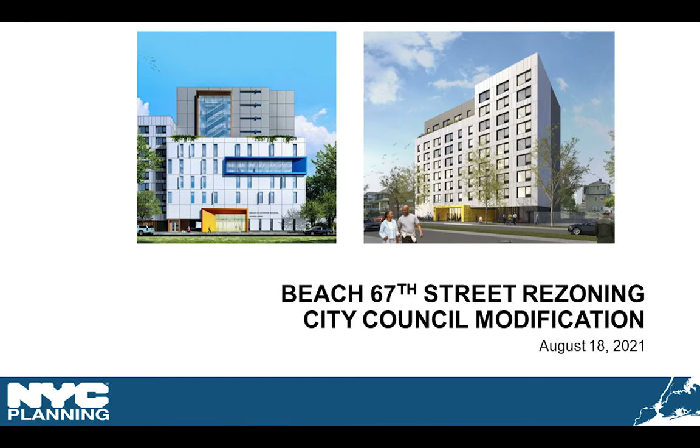Thank you. Good morning, Commissioners. This application is returning to the Commission after it was approved on July 14th as a result of the City Council modification. Next slide, please.

The modifications would reduce the rezoning boundary by eliminating one zoning lot, Block 16041, Lot 6, which is currently improved with an 8-story nursing home. Removing the nursing home site would limit the rezoning boundary to the development site lots. The nursing home would remain zoned R4A, and the development site would be rezoned to R6.

Though this is inadvisable, the modifications are within the scope of the project. No other portions of the application will change, and the applicant still proposes to construct a 9-story AIRS building and an 11-story charter school within the modified rezoning area.

The applicant has submitted a technical memorandum detailing the changes made to the project area boundary, and the E designations will be removed from the nursing home site, though the conclusions of the EAS would not change. That concludes my presentation, and I'm happy to answer any questions.

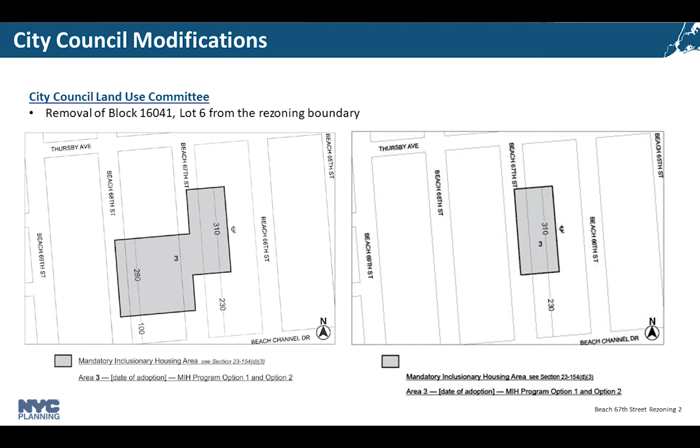So this was an instance in which the council modification is not changing what will be constructed. We had thought it made better planning rationale to bring the nursing home into more conformance. The community raised concerns about it, which were shared by the council. But the change clearly is within scope.

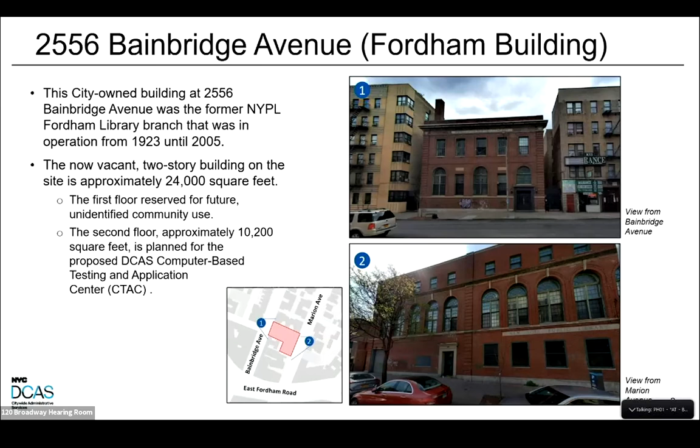It is a 2-story building, which is now vacant. It's the former site of the Fordham Public Library. We are talking about the second floor use today. It's about 10,200 square feet for a computer-based testing center. The first floor will be designated for community use at a later time.

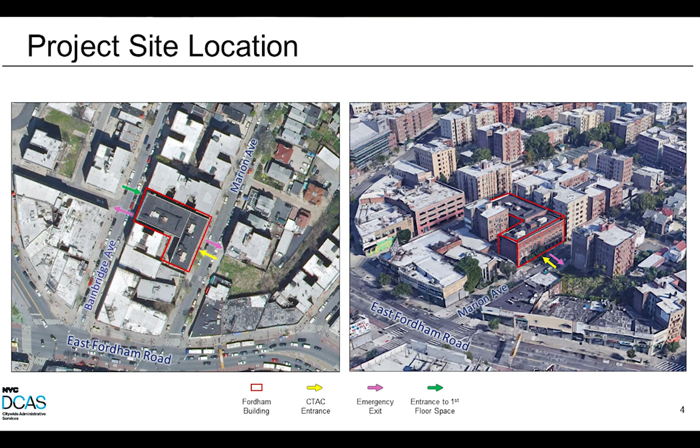This is an aerial view of the building, and as you can see, there are 2 entrances. The entrance on Marion Avenue will be the entrance for the testing center. The entrance on the Bainbridge side will be the entrance for the community use on the first floor. Next slide.

A little bit about us. We are the Department of Citywide Administrative Services. We provide shared services to support New York City government operations, and we're responsible for the recruitment, hiring, and training of city employees and other personnel services. That's part of our mission, amongst many others, and that is where the CTAC, or testing center, will fall. Next slide.

Human capital. I am proudly serving as the Deputy Commissioner for Human Capital, and we are responsible for, amongst many other things, maintaining the city's civil service system. Again, this is where our testing centers fall in, because we offer tests for jobs at this location.

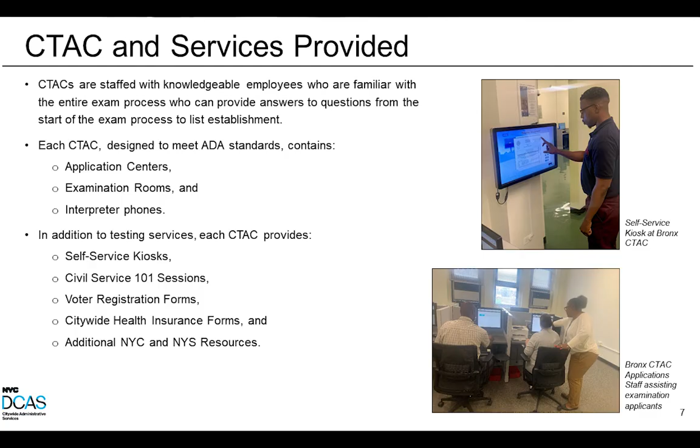Next slide. We give about 120 exams for jobs per year, and moving to this location would double our capacity to provide service to the people of the Bronx. We provide application center options. People can come in for customer service requests. We have interpreter phones. We provide voter registration, all kinds of community-based interests.

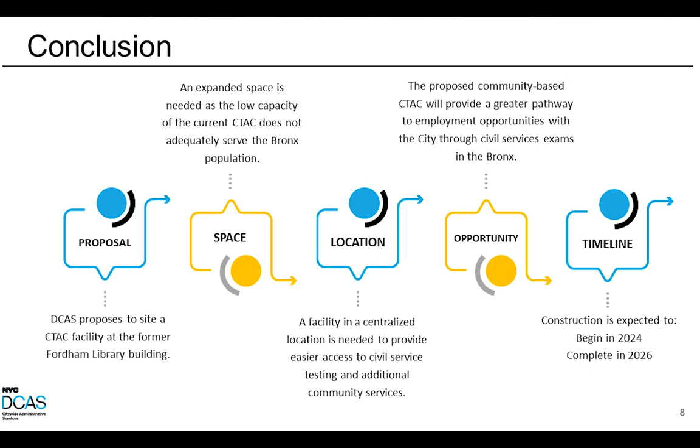Next slide. In conclusion, sorry, this is the fastest I've ever talked in my life. We propose for our testing center to move to the Fordham building, which is centrally located within the community.

Thank you. Perfect timing. Questions either for Ms. Rivetti or other members of the applicant team? Okay, thank you very much to the team and for your quick speaking.

Brian, have any other people signed up to speak on this matter? No, there are no further speakers on this item. And I don't see members of the public in the room. So with that, the public hearing is closed.

Thank you. Borough of the Bronx, calendar numbers 47 and 48, CD9. Calendar number 47, M030150A HOX. Calendar number 48, M040047A ZFX. A public hearing in the matter of applications for a modification and amendment to previously approved project plans concerning Stevenson Commons. Notice, a public hearing is being held by the City Planning Commission in conjunction with the above non-ULURP actions to receive comments related to a draft environmental impact statement. This hearing is being held pursuant to the State Environmental Quality Review Act and the City Environmental Quality Review.

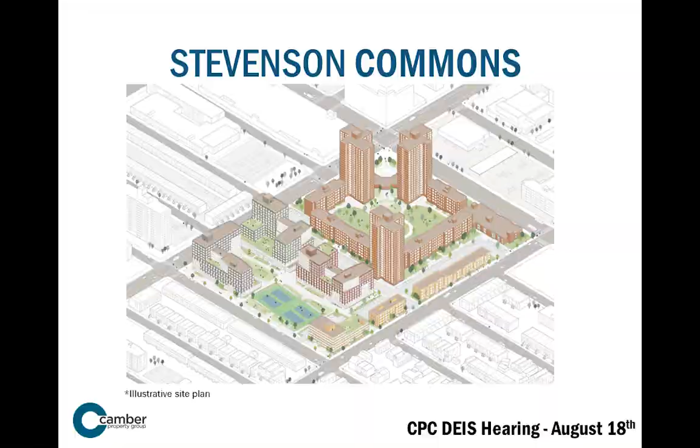We are going to have a 10-minute team presentation by a team comprised of Abir Sabet, Jacqueline Scarinci, Joanna Candell, Rick Gropper, Anderson Dosis, Joseph Dugopolsky, Claire Weiss, and Kathleen Dolphus.

Commissioner Marin is recused on this item. If we could wait a moment, Commissioner Dweck is recused, and so we need to get a quorum. Okay, we have a quorum, and so if I could ask the applicant team to please begin.

I don't see Jackie from Akerman available. Is she available at this moment? I would ask that the remainder of the large applicant team please commence the presentation. Sure. Okay. Then I will ask if we can forward to the next slide.

Good morning. My name is Joanna Candell. I am project manager for Stevenson Commons. Thank you to commissioners. We're pleased to be here today.

When complete, Jackie, you're here. Yes, I apologize. It was not put into the panelists, but thank you for adding me in. Thanks. Perfect. Well, I'll go quickly. So we already covered introductions, right?

Camber is requesting discretionary actions to facilitate a new residential and community facility development. The Stevenson Commons site, outlined in red, consists of the entire 679,000 square foot superblock bounded by Lafayette to the north, White Plains Road to the east, Seward Avenue to the south, and Thieriot Avenue to the west.

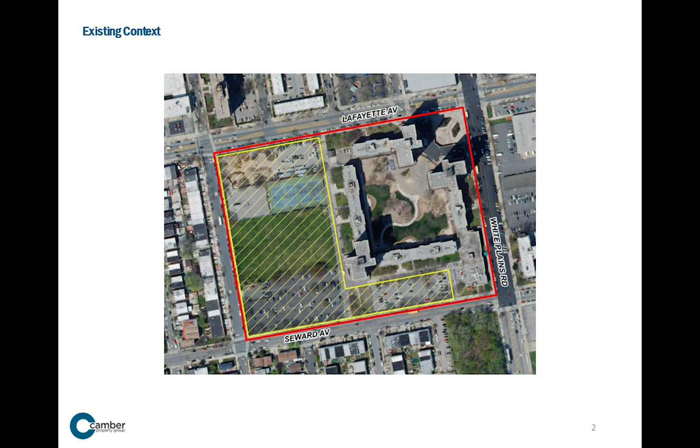The eastern portion of the Stevenson Commons site is occupied by a 9-building Mitchell-Lama housing development with 948 income-restricted housing units, local retail, and a health center. The western portion of the block is occupied by underutilized land, surface accessory parking, and private tennis and handball courts that have been closed due to unsafe conditions. The proposed new development will be located on this western portion of the property.

The proposed development is compliant with the underlying R6 zoning district. The location and bulk of the existing Stevenson Commons buildings will not change, and no new modifications of the zoning provisions are required for either the proposed new development or the existing Stevenson Commons development.

The actions requested by Camber Property Group are: the first is a modification to the 1973 Stevenson Commons large-scale residential development plan to update the previously approved plans and zoning calculations to reflect the proposed new mixed-use development. The second is a modification to the 1973 Stevenson Commons city-aided limited profit housing project pursuant to New York State private housing finance law to update the proposed development.

The DEIS conducted in connection with the project identified significant adverse impacts in construction noise, construction traffic, and transportation traffic, and further analysis and mitigation measures will be studied between the DEIS and FEIS for this project. I will now turn it over to Joanna Candell of Camber to discuss the project proposal in greater detail.

Thank you, Jackie, and thank you to the commissioners. When complete, the project will provide 700 units of affordable housing to the Soundview community, including senior, rental, and home ownership opportunities. In addition, the proposed project will include 33,000 square feet of community facility, 466 parking spaces available for residents of the development, along with passive and active recreation opportunities in the newly landscaped area.

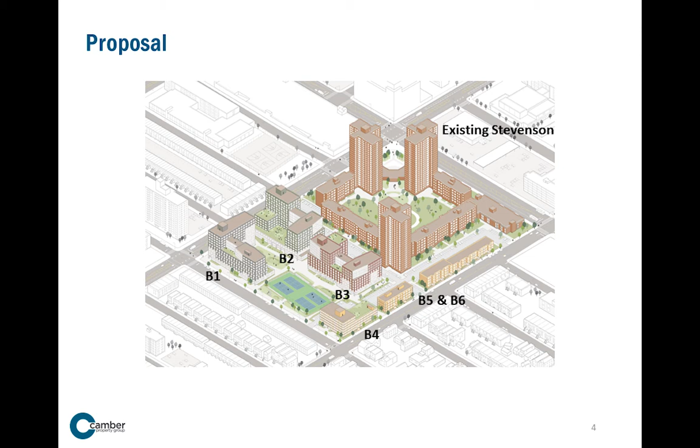Originally built in 1975, Stevenson Commons is a 9-building Mitchell-Lama complex, inclusive of 948 units of Mitchell-Lama housing overseen by HPD. In 2017, with financing and continued oversight from HDC and HPD, Camber purchased the property, extending the regulatory agreement an additional 40 years, obtaining project-based vouchers, and financing a $36 million capital improvement campaign. These improvements included upgrades to apartments and building systems, along with upgrades to common areas and security.

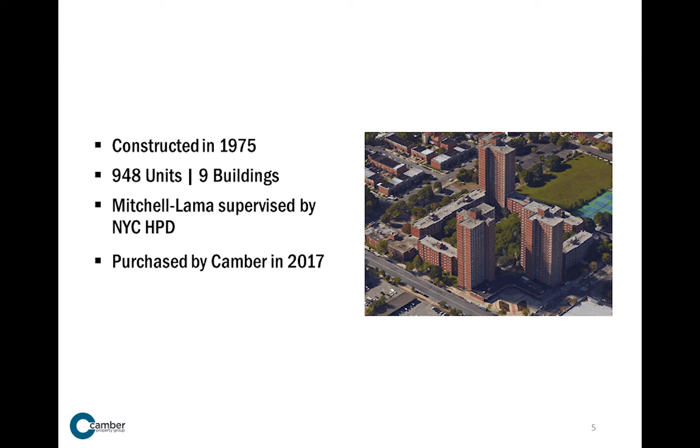Additional quality of life improvements included new services for building seniors through our partnership with RAIN and the reestablishment of the Stevenson Commons Tenants Association.

Next slide. As designed, the project will enhance the pedestrian experience by activating otherwise unusable area that is currently closed off to pedestrians. When complete, the proposed project will include a convenient pathway for neighborhood residents to use, along with new tennis facilities, a new playground designed in collaboration with Community Board 9, and passive recreation areas.

The community facility space will be distributed across multiple buildings and will include universal pre-K, space for after-school programming and community events, along with an administrative area for the New York Junior Tennis and Learning Center to build up their community tennis program that already exists at Stevenson Commons.

Parking will be provided for residents of the existing property, along with residents of the new development, and project construction will be phased to ensure tenant quality of life and parking availability is not affected.

Next slide. Our first phase is our home ownership phase, and I'll move quickly through these, and I'm happy to answer questions on them later. This will include 58 units of affordable cooperative housing built in partnership with Habitat for Humanity and available to individuals earning between 80 to 100% of AMI.

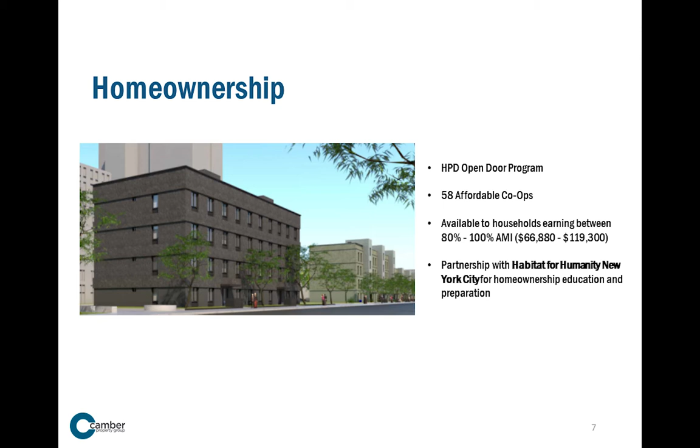Next slide. Our second phase is the senior community, which will include 117 units of senior housing built under HPD's SARA program and available to individuals and households making up to 50% of AMI. We are partnering with RAIN again to provide social services on site here.

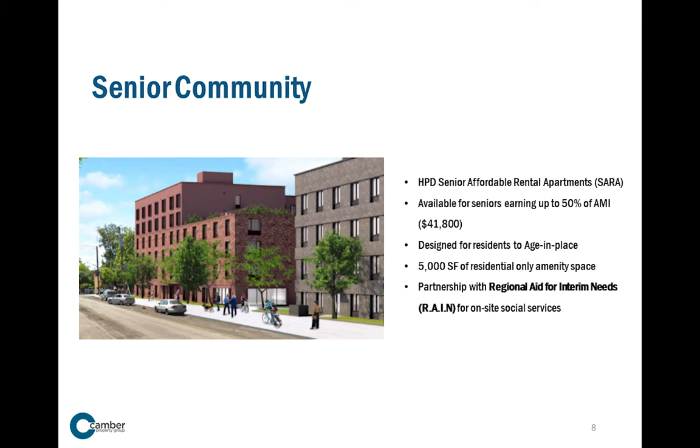And lastly, next slide please, is our multifamily rental properties. These 3 buildings will combined have over 600 units and will be built in conjunction with HPD's low and moderate income term sheets. I'm going to pass the presentation over to my colleague Jacob from WXY, who can review the site design and planning.

Hi, Jacob from WXY here. Next slide, please. So the master plan breaks open a courtyard typology with new pedestrian connections on this half of the super block, with a major pedestrian path aligned with Leland Avenue.

There's east-west connections as well that align with the secondary entrance to Stevenson Commons and to the south of the existing courtyard complex. The existing service drive, shown in the bottom right in gray, is realigned with Underhill Avenue at the north and is lined with parking and serves as a spine to connect at-grade lots and 2 structured lots, maintaining existing tenant parking and parking required for the new developments.

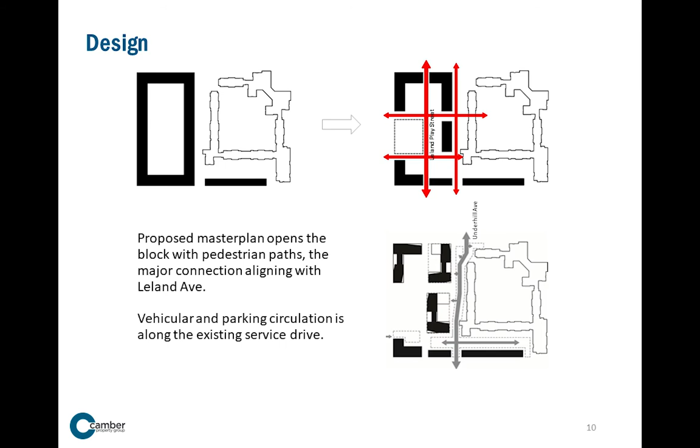Next slide. The proposed massing negotiates between the tower-in-the-park developments to the north and the east and the townhome scale to the south. Proposed buildings B1, B2, and B3 at the north.

They start with a 6-story block that relates to the existing complex and provides a street wall along Lafayette Avenue and set back along Thieriot Avenue to the west. The upper building portions vary in height from a total building height of 14 floors at the northeast down to 9 floors and are broken down through single-loaded segments between a higher and lower bar in each of these 3 buildings. And then select corners are chamfered in the zoning envelope to further break down the massing in this composition.

The 3 buildings along Seward Avenue step down from a 6 and 4-story senior building at the corner, B4, and 4 and 3-story walk-up units, B5 and B6. And the careful stepping and variation of heights and building types will provide a frame for the open space.

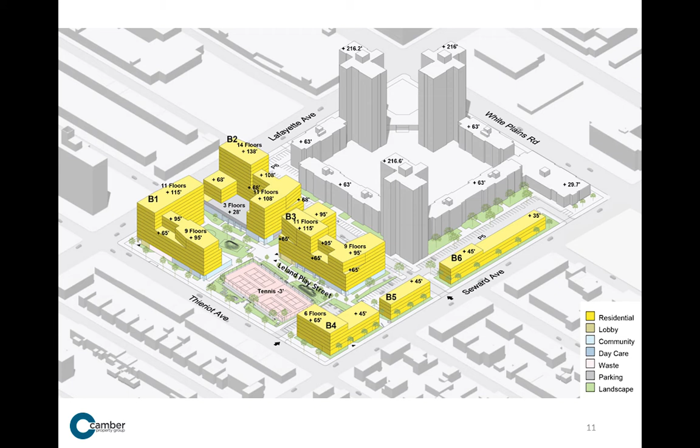Next slide. So the open space is activated through outdoor program spaces and gathering and seating supported by the buildings around. You can see the primary elements, Leland Ave or the Leland Play Street.

And starting from Lafayette Avenue at the north, there's a proposed playground, urban fitness, adjacent to a new childcare facility in B1. The 4 existing tennis courts on site are rotated and resituated at this side for optimal sun exposure.

And as mentioned, will be operated by the New York Junior Tennis League, which will also have ground floor space in B1. Community gardens allotments around the tennis courts and multi-generational and community rooms in B1, B2, and B3 along the Leland Play Street to support senior and youth after school programming along this path.

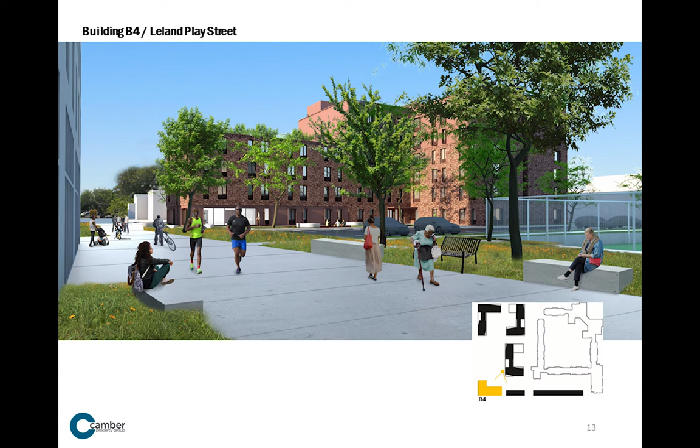Here's a view of the proposed Leland Play Street with tennis courts to the right, a wide pedestrian path, and direct visibility from the street. That's building B4, the senior building at the corner, which has a pass-through lobby to engage Seward Avenue and also connect to open spaces for seniors to the north.

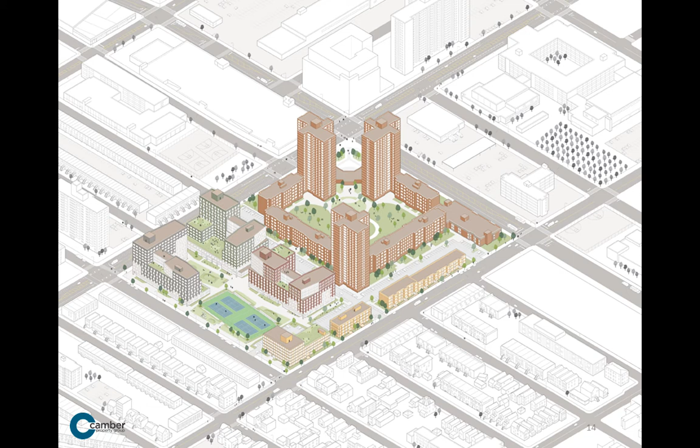Next slide. So the overall view provides a set of 6 new buildings that work between the adjacent 21-story towers, and the proposed massing steps from 14 stories at the northeast to 3 stories at the south. Materiality and colors will complement the existing brick of Stevenson Commons and the wide variety of colors and textures in the context. The community benefits of open space.

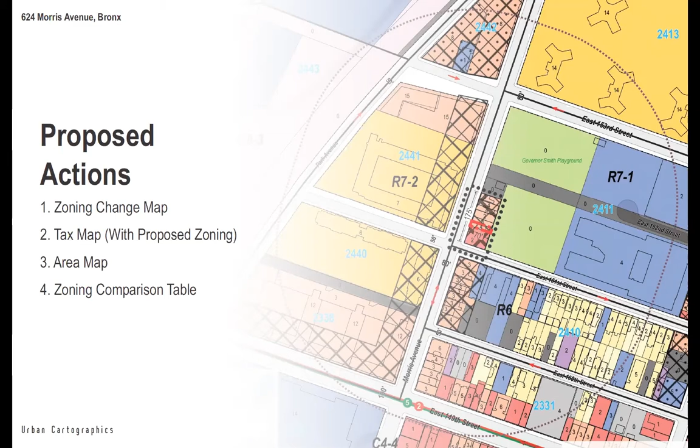Thank you very much. Questions from the commission? Thank you. And Ryan, I don't see any other folks signed up to testify. No, there are no further speakers signed up on this item. Okay, then this public hearing is closed.

Borough of Queens, calendar numbers 50, 51, CD8, calendar number 50, C210192, ZMQ, calendar number 51, N210193, ZRQ. A public hearing in the matter of an application for zoning map and zoning text amendments concerning 185-17 Hillside Avenue rezoning. Our first speaker will be Richard Lobel.

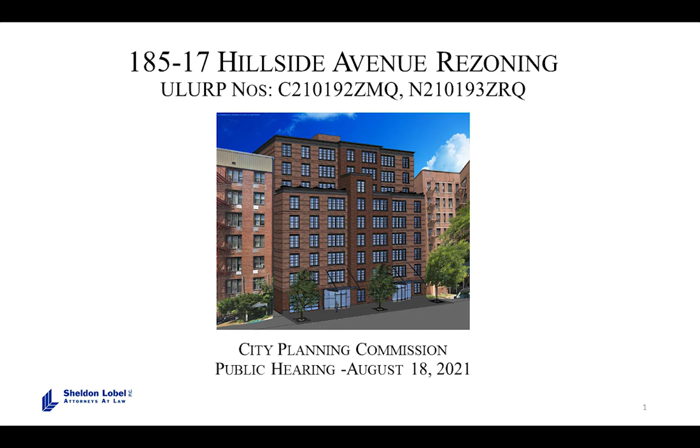We join you today to discuss the 185-17 Hillside Avenue rezoning. Really what we're seeking here is several actions: first, a map amendment to rezone part of 5 lots from R3X to R7A C24. There would also be a zoning text amendment to allow certain provisions of Article 11, Chapter 5 to extend to properties within this special downtown Jamaica district. So the rezoning includes both the map amendment and a text amendment to extend the downtown Jamaica district. And finally, revisions to Appendix F to allow mandatory inclusionary housing to apply.

On the zoning map here, it's useful to note that the special district is only mapped where there is largely limited development, not only on this block but also on other blocks burdened with this condition. So 1,000 feet to the west along Hillside Avenue, the special district pursuant to the Jamaica plan zones these districts to the full lot depth of 180 feet or 160 feet, and to the east matches lot depths of 100 feet. Here, however, despite having a lot that exceeds that amount going to 160 feet, the Jamaica district was only mapped to 100 feet. This has resulted for many of these properties in underdevelopment or no development.

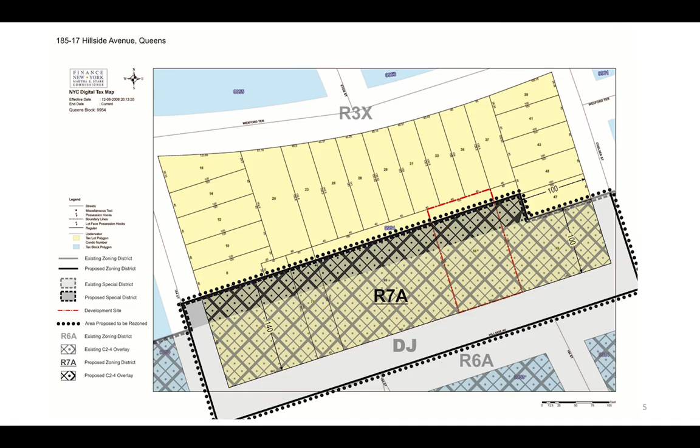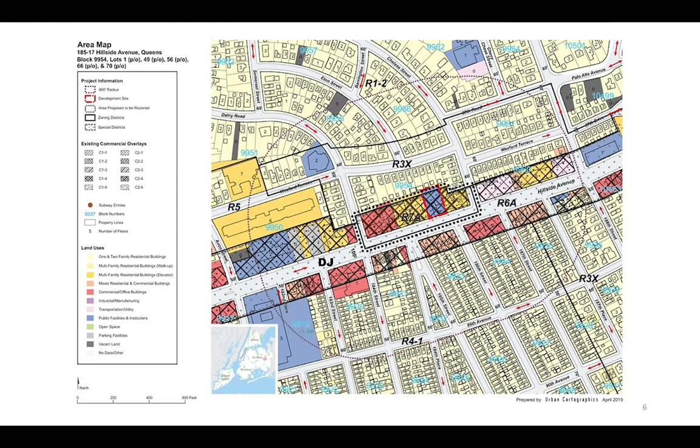So I would close merely with demonstrating why this is such a good idea. The lot here lies along Hillside Avenue, a 100-foot wide street. The lot is additionally near public transportation, with Jamaica being a transit hub, particularly with regards to several subway lines and over 8 bus lines that traverse Hillside Avenue. And with that, although we have maps and photos demonstrating the proposed plans and units, we'll produce development in line with the surrounding residential buildings of 6 to 7 stories, and I'm happy to answer questions.

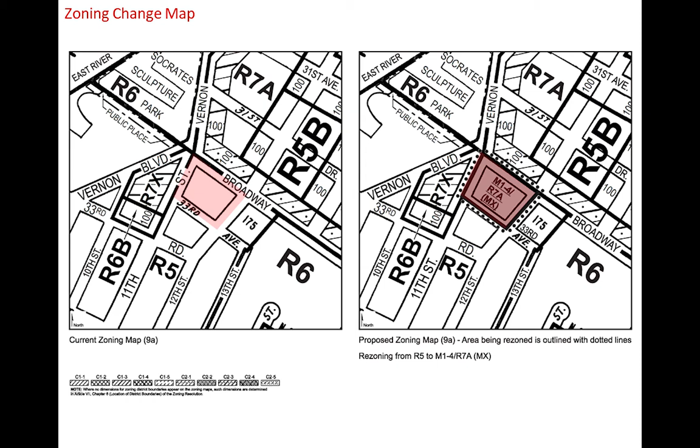Next slide, please. This slide shows the existing R5 zoning on the left with the site shaded in red. The right shows the proposed M1-4 R7A MX23 district. The special mixed-use zoning designation was established in 1997 to encourage investment in and enhance the vitality of existing neighborhoods, such as Ravenswood, with mixed residential and industrial uses in close proximity. It was intended to create opportunities like this project for mixed-use communities by allowing a balance of and variety of uses, including light industrial uses consistent with the historic character of the area. The MX district allows for new medium density mixed use development with the surrounding built context.

Next slide, please. The proposed action would facilitate a mixed-use development with approximately 199 dwelling units, 50 of which would be permanently income restricted, and new job-generating uses, including approximately 26,686 square feet of commercial and light industrial uses, proposed as a grocery store, local retail with an outdoor cafe, an artist studio, wine distributor, and floral production studio. The proposed MX zoning district ensures that this range of uses is permitted in the project area.

The breakdown of MIH units by income band and unit size is shown on this slide: 17 units at 40% AMI, 17 at 60%, and 16 at 80%, for a total of 50 permanently income restricted units for MIH option 1. HANAC will be the project's MIH administering agent. And now I'll turn it over to Nelly Hennessy of Caliendo to discuss the design. Next slide, please.

Good morning, commissioners. The proposed building wraps the entire block, maintaining a continuous street wall on each frontage with active first floor uses to enhance the streetscape.

To accommodate the non-residential programming, off-street accessory loading berths are provided on 33rd Avenue and 12th Street. A freight elevator is located adjacent to the 12th Street loading dock to provide direct access to the cellar.

The northwestern corner of the building is chamfered to accommodate an outdoor seating area accessory to the first floor commercial space. Next slide, please. The next two slides show the proposed building from all sides.

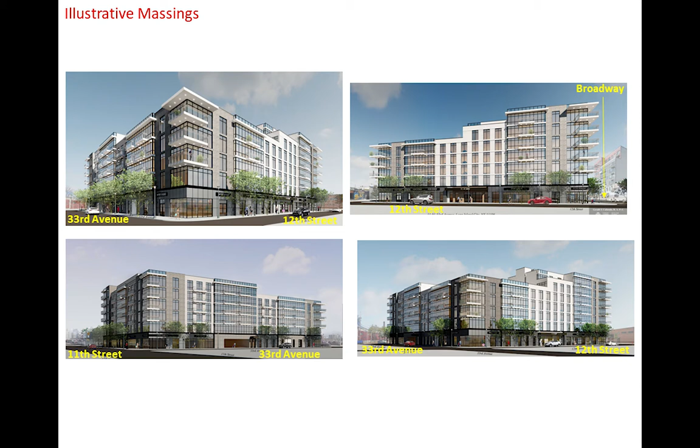Here you can see how the building steps down from 7 stories on Broadway. Along 33rd Avenue, the southwestern corner of the building at 11th Street is 6 stories, and the southeastern corner of the building at 12th Street is 5 stories.

Now Damien Smith will discuss programming. Next slide, please.

Good morning. The proposed development serves a need in the community as there's currently very little local retail in the area. The ground floor of the proposed development has a grocery store, wine distributor, floral production studio, and local retail. The proposed MX zoning district ensures that this range of uses is permitted in the project area.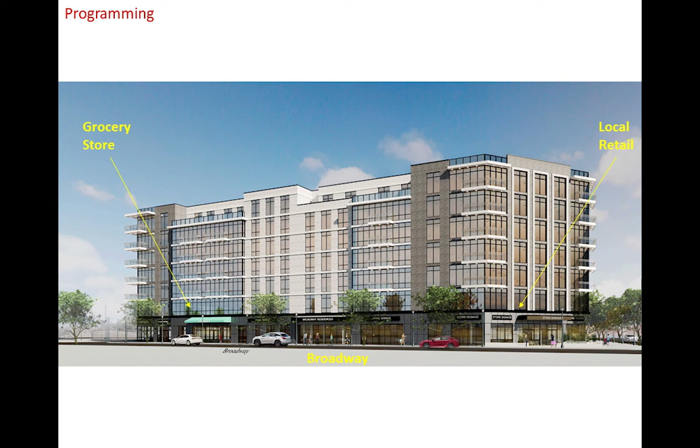Next slide, please. The wine distributor and floral production studio are both intended for existing local Queens businesses seeking new space in the area. The wine distributor, Tobacco Wine Merchants Inc., is planning to move its operations from Nassau County. The florist, Cambridge Floral Design, intends to relocate from Long Island City.

That's the end of the presentation. We're available for questions.

Thank you. Questions from the commission? Commissioner Capelli: Hello, yes. Can you explain exactly what a wine distributor is and what a floral production studio is?

The wine distributor sells bulk wine to restaurants in the New York City area, Westchester, and Nassau County. They bring in pallets of wine, then break them up and distribute them as needed to the restaurants.

The Floral Design company works in a lot of the hospitals and office buildings in Manhattan to do all the floral and decorations and landscaping at the front of the buildings and in the lobbies for all the commercial buildings.

Is there any retail component with either of these? There will be a retail component with the Floral Design. There is a florist as well, and then they also produce baskets and other floral productions.

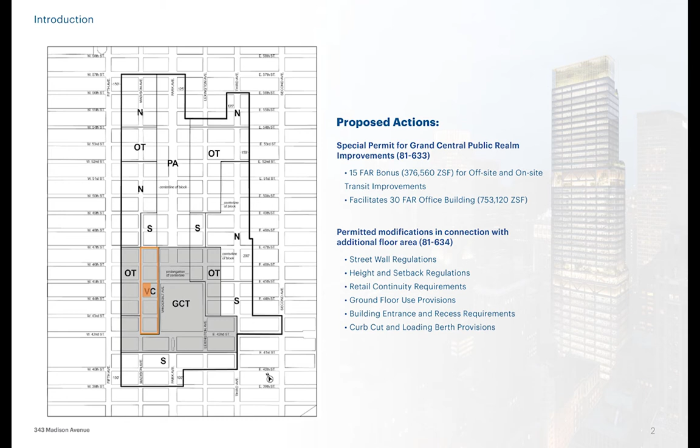Bob will give some background on the project's importance for the MTA. Thank you, Zach. I'm Bob Paley, Director of Transit-Oriented Development at the MTA. This project has been long in the planning.

In 2015, MTA moved out of our Madison Avenue building and consolidated staff at 2 Broadway. Following an RFP and competitive bidding process, the MTA board approved the selection of Boston Properties to develop the property under a 99-year ground lease. Under the approved transaction, Boston Properties will pay MTA yearly rental payments as well as full property taxes.

As contemplated by the RFP, these payments will provide critical ongoing funds to support MTA's capital budget. The project will provide both on-site and off-site transit improvements. Off-site, there will be 3 scopes of circulation improvements within the 42nd Street subway station. On-site, the project will construct the first direct entrance to the Long Island Railroad's new station on the east side, which we refer to as East Side Access. Zach will walk through the details of the off-site improvements first.

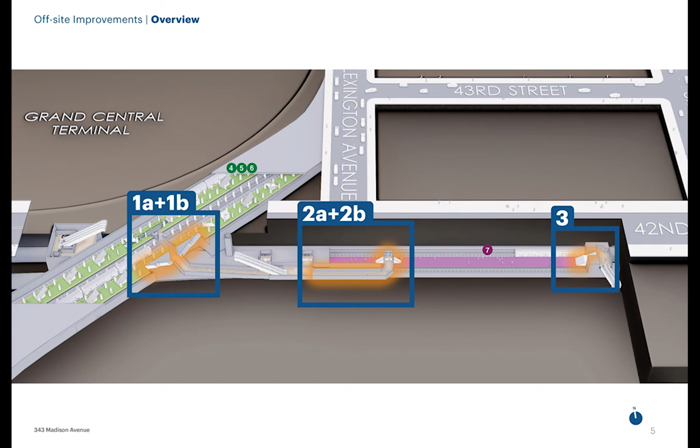On screen now is the 42nd Street subway station. The Lexington line platform, shown in green at the left of the screen, runs at a diagonal here. The Flushing line platform, shown in purple, runs east-west, a level below the Lexington line. The proposed off-site improvements provide 3 critical packages of improvements to these platforms, which I'll walk you through one by one.

The first improvement is expansion of the 2 staircases leading from the northbound 4-5-6 platform to allow an additional passenger lane at each stair, increasing capacity by 1/3. This will contribute to better on-time performance on the Lexington line.

Moving down to the Flushing line platform, the second scope of work is construction of a new passageway and a pair of staircases at the center of the platform, where no stair exists today. The additional stairs will reduce the time passengers are lined up on the platform waiting to move toward their destinations. To connect this stair, a new passageway will be constructed underneath Lexington Avenue, which you can see above on the left side of the screen, as an extension of the existing mezzanine level for the Flushing line.

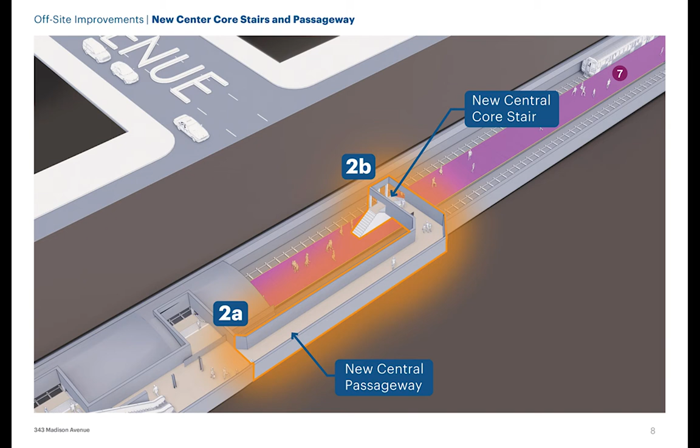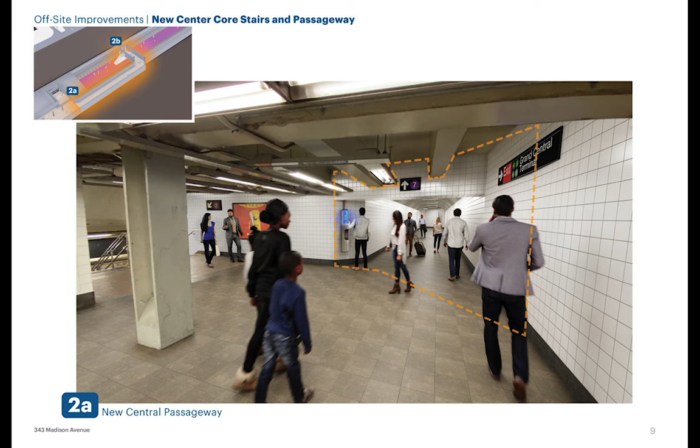Here's a rendering of the new passageway. It's outlined in orange or yellow on the screen. Right now there's a wall there, and the passageway you see looking forward is underneath Lexington Avenue, as I described.

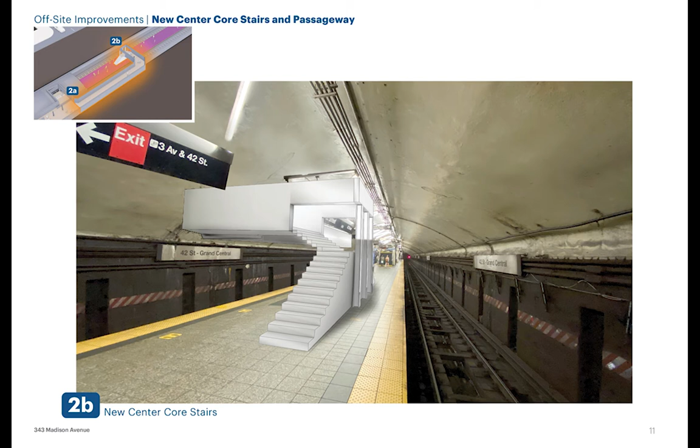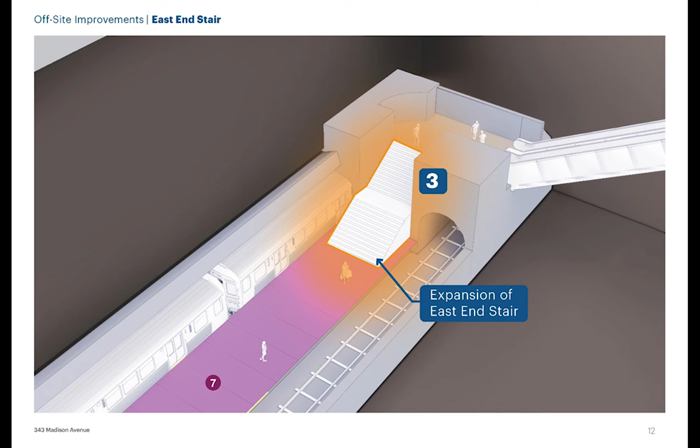The third scope of offsite improvements is widening the east end stair, which connects up to 3rd Avenue, from 4 lanes to 6 lanes. This stair is currently a bottleneck in the passenger flow, causing backups on the platform. The expansion will provide improved passenger flow and a better rider experience.

Here's an image of the existing east end stairs, with the white on the sides illustrating the 50% expansion that is proposed. This is a rendering of the proposed new stairs with 3 stairways and 6 lanes instead of 4 lanes.

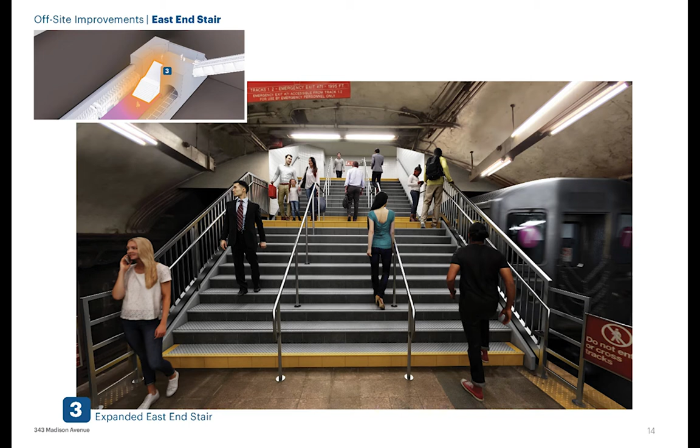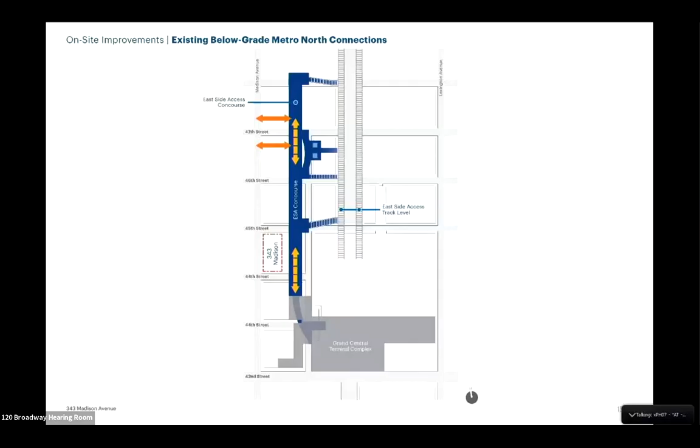I'll turn it back to Bob to introduce the on-site improvements. Next year, MTA will introduce the new East Side Access Terminal for Long Island Railroad, and the platforms for this terminal are located 160 feet below Park Avenue. Riders will get from their trains to the new Concourse using a set of 3 escalator banks from track level.

The largest escalator bank is at 45th Street, located at the southern end of the platform. Using currently planned street exits north and south of the development site, riders using this escalator bank would need to travel north or south to the street.

The redevelopment of 343 Madison allows our first direct escalators between street level and the Concourse. The direct access will be located in line with our largest escalator bank to the platform, directly in the desired path of travel of many riders. As compared to traveling north or south to exit, this entry provides substantially reduced travel times for our riders.

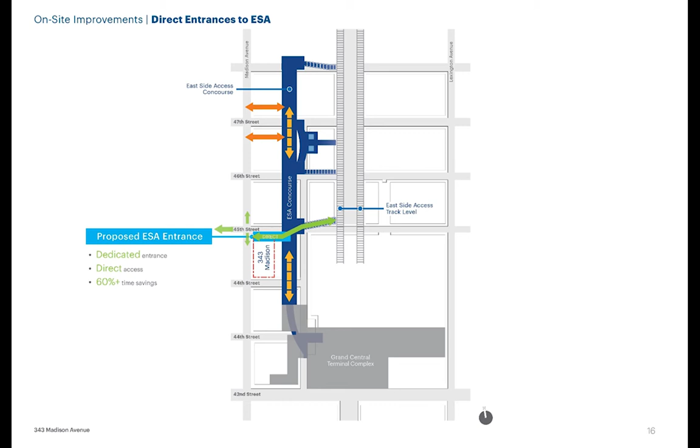I'm Rich Monopoly, Senior Vice President of Development for the New York region at Boston Properties. Thank you for having us today. This slide shows the existing site conditions with the ESA Concourse adjacent to bedrock below the site.

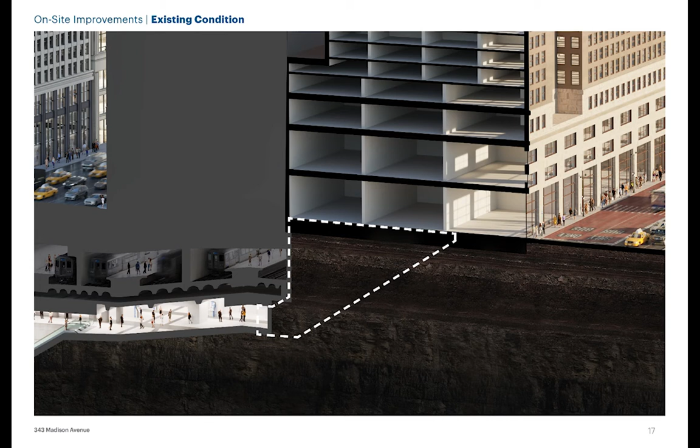The new entrance will connect directly Madison Avenue to the ESA Concourse level. Construction of this improvement involves excavation through bedrock to 50 feet below grade.

After the excavation of bedrock, we will install and maintain the following station elements: 3 escalators to reach the station 50 feet below grade, a new stairway you see in the center alongside the escalators, and on the right-hand side, an ADA elevator between street level and the ESA Concourse level. This rendering shows these elements leading to and from the ESA Concourse.

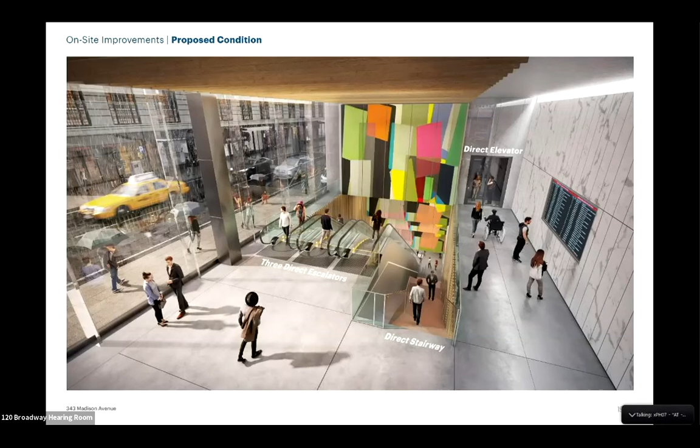Next slide, please. Here's a rendering of the new entrance looking south from 45th Street. We have recessed the building above, allowing a double height transparent entrance to stand out prominently from the rest of the building. This will become a well-known connection point in East Midtown.

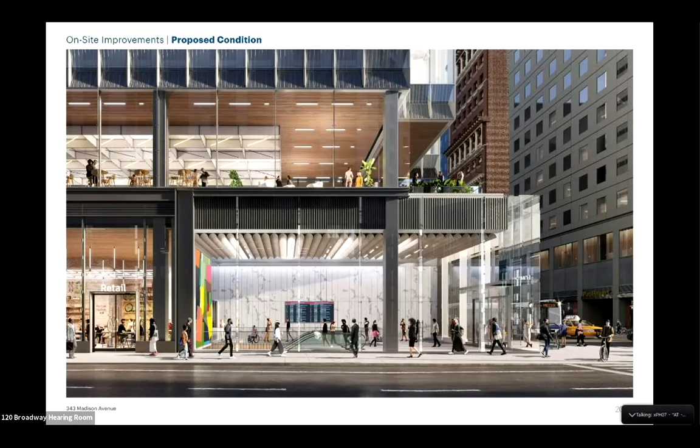With that, I'll turn it over to Andrew Cleary of KPF to tell you more about the building itself. Next slide, please. Thank you, Rich. The site footprint is 25,000 square feet in area, which is relatively small for an office development.

Within this footprint, the site planning is guided by the MTA's vent building on the south and the new transit entrance on the north. We are pushing the building back from Madison Avenue as required to create a 20-foot wide sidewalk, and we're widening the 45th Street sidewalk to 15 feet.

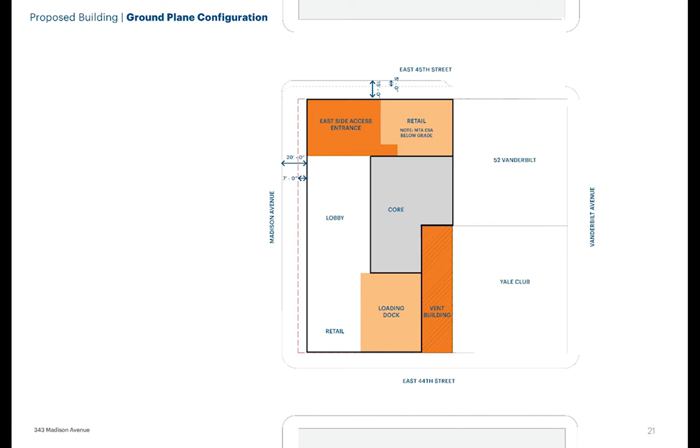Next slide, please. Taking those considerations into account, our core with the elevators will be at the eastern edge of the site. The building lobby will be along Madison Avenue, and required loading docks will be along 44th Street, with retail at the 44th Street corner and along 45th Street.

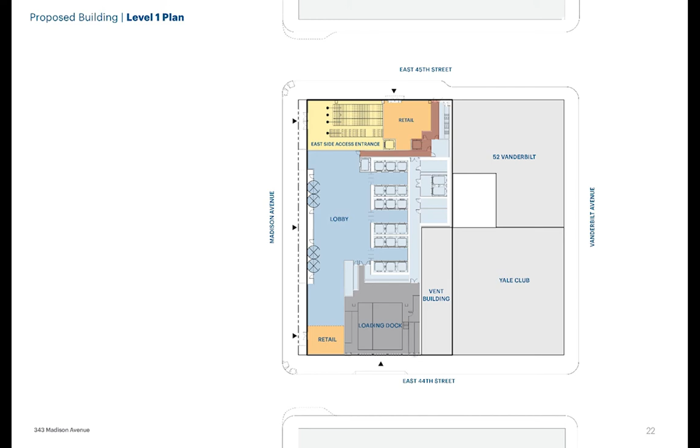The right-hand diagram illustrates the setbacks at the south of the building, breaking up the mass as the building rises. Next, please. This context elevation illustrates how the podium sits with the varying street walls of its neighbors. Our base at 321 feet is below that of our southern neighbor at 335 Madison, and similar to the height of the Yale Club to our east.

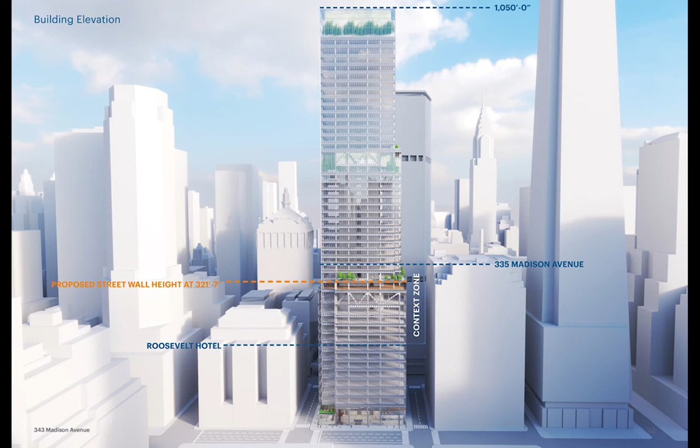The total building height of 1,050 feet is lower than One Vanderbilt and similar to that of the Chrysler Building, which you can see in the background a few blocks away. Next, please. And here is a view from East 45th Street showing another view of the transit entrance sitting proud with the building entrance, with the building recessed above.

Next slide, please. The Owl's Head facility site is within the Southwest Brooklyn Industrial Business Zone, IBZ, and this map shows that the majority of properties in the area are zoned industrial and manufacturing.

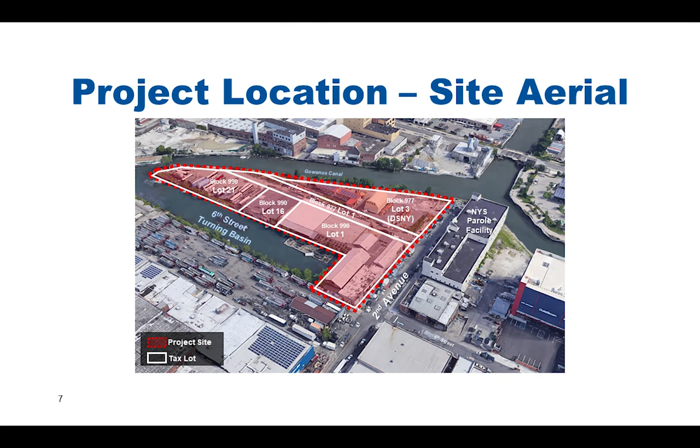Next slide, please. Here's an aerial of the site overlaid with the block and lot information of the parcels we plan to site select and acquire. Block 977, Lot 3 is already owned by the city and is home to the Department of Sanitation salt shed and plow storage, as well as composting and nursery facilities operated by Big Reuse in partnership with the Gowanus Canal Conservancy. We are working closely with sanitation and these organizations to relocate their operations during construction and reestablish permanent facilities for them on site.

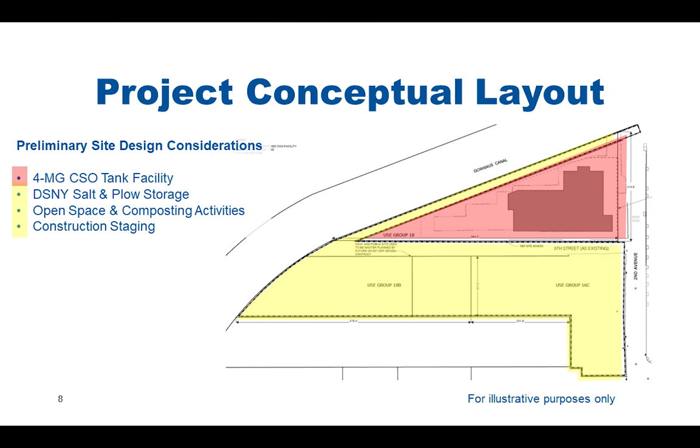Here's an illustrative slide of the conceptual layout for the use of the site. The salmon colored triangle at the top is the area that will be used for the DEP CSO tank and associated head house. The yellow areas will be used for construction staging of the CSO tank, relocation of DSNY's operations and Big Reuse and GCC's facilities, and also provide some open space along the waterfront.

Next slide, please. The first city map amendment would demap 5th Street between 2nd Avenue and the canal. The second city map amendment is at the head end facility site, and that would demap Douglass Street, which is a paper street, between Nevins Street and the canal. At this point, I'd like to turn over the presentation to my colleague, Rashid Lucas.

Thanks, Kevin. Next slide, please.

In February 2018, we issued an environmental impact statement, or EIS, which identified potential impacts to historic resources. DEP issued a technical memorandum this past April to review the environmental impact area and found no changes since 2018. DEP since completed a geoarchaeological assessment and concluded that there is a low potential to impact deeply buried archaeological sites. Nevertheless, DEP has committed to conduct archaeological monitoring during construction activities.

I'd like to pass it over to Lisa now. Thank you. Next slide, please. So this is our anticipated schedule.

We hope to complete ULURP later this year, and we are just kicking off design of the facility, and we plan to complete design in fall 2023. Construction is anticipated to take approximately 5 years with completion in 2028.

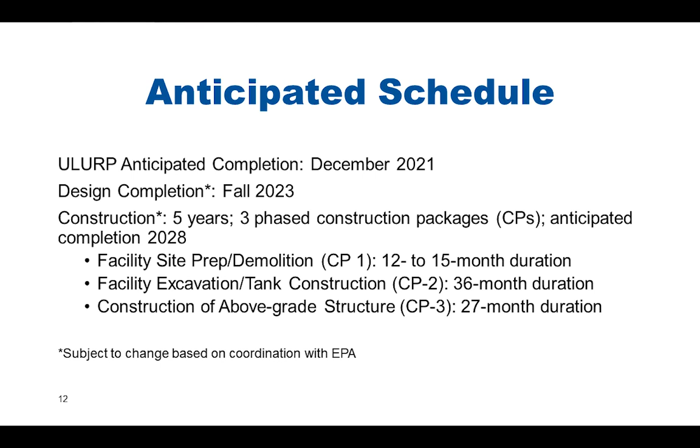We've broken up the construction into 3 construction packages. We call those CPs, and they have overlapping timelines, with durations noted on this slide. CP1 is site prep and demolition of the existing facilities, as well as relocation of DSNY's facilities. CP2 is all of the below ground work, including installation of the supportive excavation, the excavation itself, and the below ground structures. CP3 is the above ground work, including the head house and the fit out.

Next slide, please. The city has been in contact with property owners and the tenants on the parcels to be acquired. We're working with the South Brooklyn Industrial Development Corporation in our outreach to the tenants. Just this Monday, we had our first forum to discuss the project, how it will impact the tenants, and what resources are available to them.

We plan to work with SBIDC to keep the line of communication open, provide updates, and answer questions as they arise. Like we did with the head end site acquisition, the city will provide relocation services for business tenants, including help identifying new locations based on the tenant's needs, coordinating showings, and facilitating negotiations. This also includes potential reimbursement for reasonable moving expenses and compensation for trade fixtures.

Based on our schedule, we estimate that we could acquire the properties as early as spring 2022, and we would not require tenants to vacate at that time. Rather, the city would become the landlord and assist with relocation by the end of the year.

Next slide, please. In our community outreach related to the head end tank site, we had a series of meetings, workshops, and hearings in partnership with community stakeholders and also Councilman Levin's office. As we begin the design process for our Owl's Head tank, we are planning a number of opportunities for public engagement to educate the community about the project, to hear from folks about what they'd like to see here, and to solicit feedback on the design.

We're working closely with Councilmember Lander's office, as well as the Gowanus Canal Conservancy and SBIDC, to ensure that we have an opportunity to hear from the key stakeholders and the community at large. We know there's a great deal of interest in the site, and as we embark on the design, it's important for all of us to ensure that we have a clear line of communication with the public. So that's our brief presentation, and we're happy to answer any questions you may have.

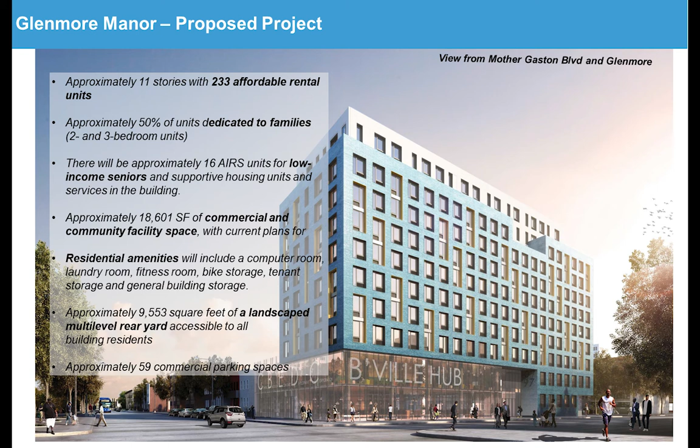The project is being financed by HPD's ELLA program, which is the extremely low and low-income affordability program, and will service households earning between 30% AMI and 80% AMI through income averaging. At least 50% of the units will be designated for families below 50% AMI for that particular year.

And 30% of the units will be designated for formerly homeless households with supportive housing services. As mentioned, there will be 16 units for low-income seniors. On this sheet are the AMIs from the 2019 submission, showing the 30% AMI income range as well as the rent range, which again supports the emphasis on extreme affordability in this project.

At this time, I'm going to turn the presentation over to Don Flagg from Think Architecture, which was our architectural partner for our response to the Brownsville RFP Site B. He will give you an overview of the context of where the project is located and the thought process about the design.

Yes, I'm here. This is Don Flagg with Think Architecture, good afternoon. On the slide on the left is the aerial view of the site. The site is bounded by Glenmore Avenue to the south, Christopher Avenue to the east, and Mother Gaston to the west. It's 1 block north of Pitkin Avenue and 1 block south of East New York Avenue. To the west are the Howard houses.

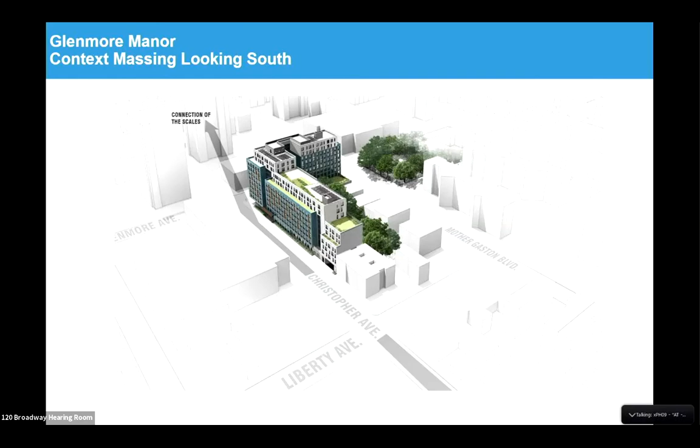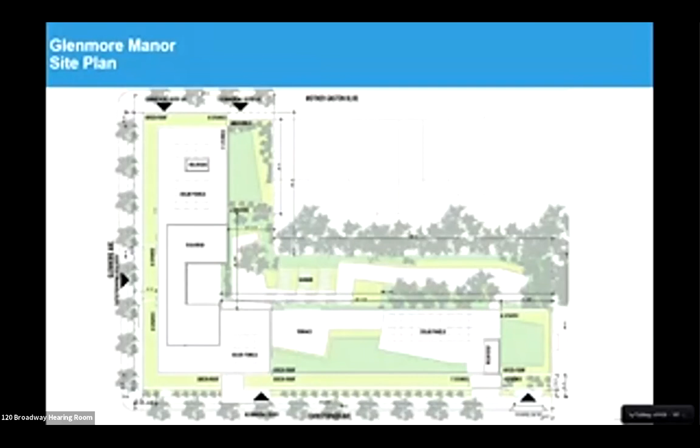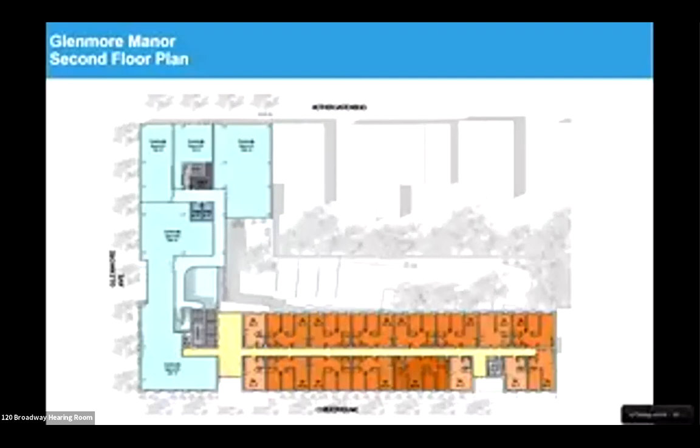Here's the 2nd floor plan, where you can see in blue the community facility uses, and the double height lobby near the elevator core that provides a view to the garden and a welcoming gathering space for the community facility functions, as well as the commercial uses below, creating a vibrant entrepreneurial incubator.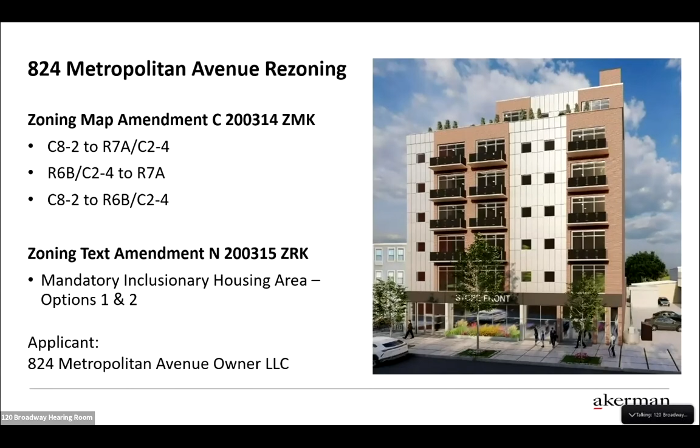Our first speaker will be Lisa Orantia. Good afternoon. My name is Lisa Orantia, Land Use Counsel from Akerman LLP on behalf of the applicant 824 Metropolitan Avenue owner. The proposed actions will facilitate a new 8-story mixed-use building with permanently affordable housing. Next slide, please. The project area is at an intersection of Metropolitan, Bushwick, and Orient Avenues near subway and bus service. The development site has a small residential building and a truck parking lot.

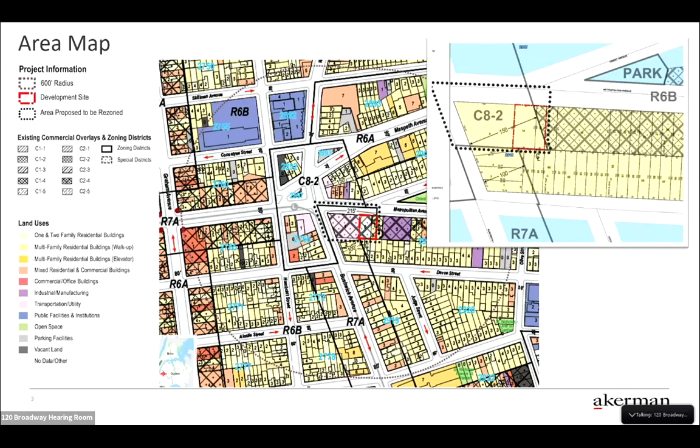The surrounding area is mostly residential and mixed commercial and residential with recently converted former semi-industrial uses. The proposed actions would establish continuous district designations by extending an R7A district that exists to the west and south, including over a portion of the corner lot, and an overlay that exists to the east. Provide for a moderate increase in density on a wide street intersection and in proximity to public transportation. Allow building heights consistent with several 7- and 8-story buildings within 2 blocks of the site, and create opportunities for new mixed uses and affordable housing where a substantial amount of recent as-of-right residential development has not included affordable units.

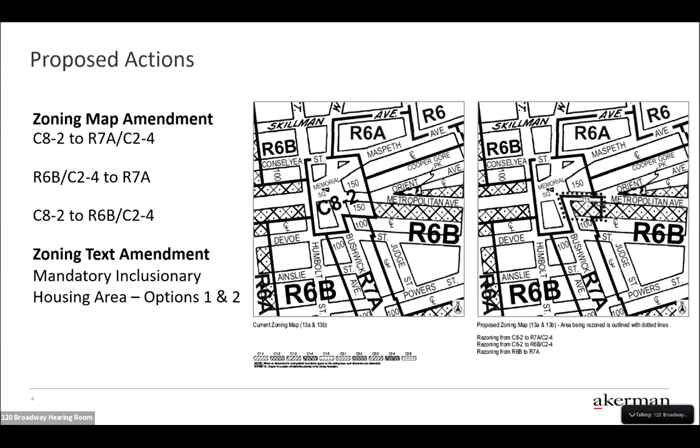The proposed development is a new 8-story mixed-use building with MIH units. Community Board 1 and the Borough President's Office recommend approval with conditions. The Borough President finds the actions consistent with sound policy and land use objectives, but is concerned about potential redevelopment of the gas station lot, which is not applicant-owned. The gas station lot is not expected to be redeveloped. It's been operating since 1980. Infrastructure was upgraded in 1995.

A competing gas station across the street stopped operating in 2018, and the gas station use can lawfully continue under the rezoning. Although there is no plan to redevelop the corner lot, the existing zoning would allow new heavy commercial uses that are not appropriate for the area, whereas the proposed actions would support sustainable development, including commercial uses suited to the character of the neighborhood. The proposed rezoning and its boundaries are rational and advance planning goals of adding density at a transit-oriented site and supporting the productive use of underutilized land that addresses the need for affordable housing. That concludes the presentation. Thank you.

Questions from the commission? Commissioner Dweck: You mentioned recommendations. Can you speak to the bedroom mix and other recommendations that there were?

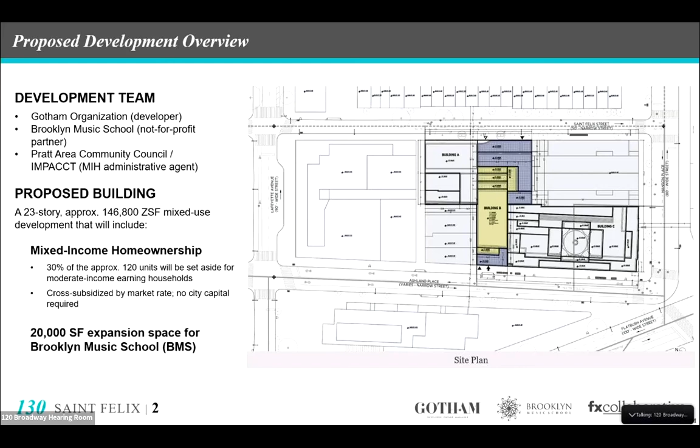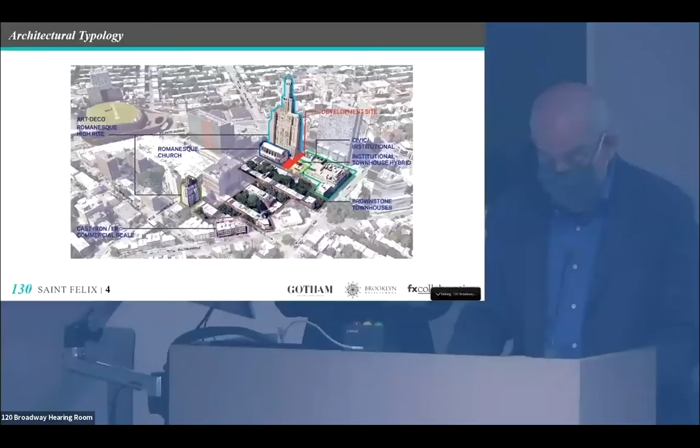Good afternoon, Chair Lago and Commissioners. Dan Kaplan, Senior Partner, FX Collaborative Architects. The site is shown in red between downtown Brooklyn, the BAM Historic District, right next to One Hanson Place and the former Williamsburg Savings Bank Tower, and along St. Felix Street with its collection of community, cultural facilities, and brownstones, which really informed our design.

3 key principles drove our design thinking. Number 1, create a transition from downtown Brooklyn and the Flatbush corridor to the BAM and Fort Greene historic districts. Number 2, respect One Hanson Place by keeping the height of the building significantly below the shoulder of the building so that the tower rises free, tapering the building up, and pushing the building against the lot line.

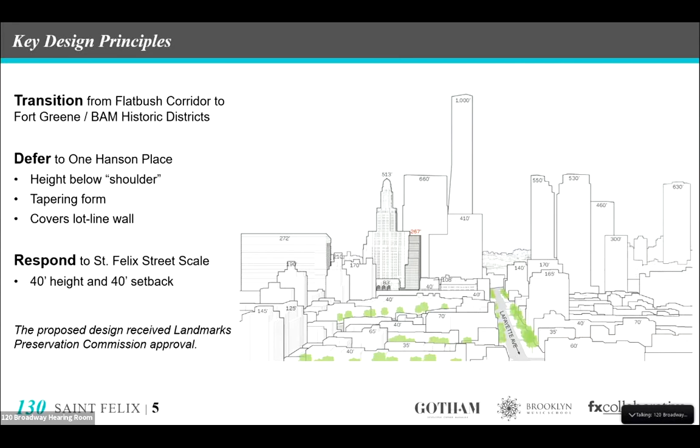The third point is to relate the building in scale to St. Felix Street. It is worth noting that the design you're going to see received approval from the Landmarks Preservation Commission as being appropriate.

Here you can see the rendering of the building in situ, rising from bottom to top. The significant setbacks from St. Felix Street, 40 feet in 2 steps, the building rising up, tapering below the shoulder of the Williamsburg Savings Bank Tower, and of course, making the transition to the taller buildings along the Flatbush Avenue corridor.

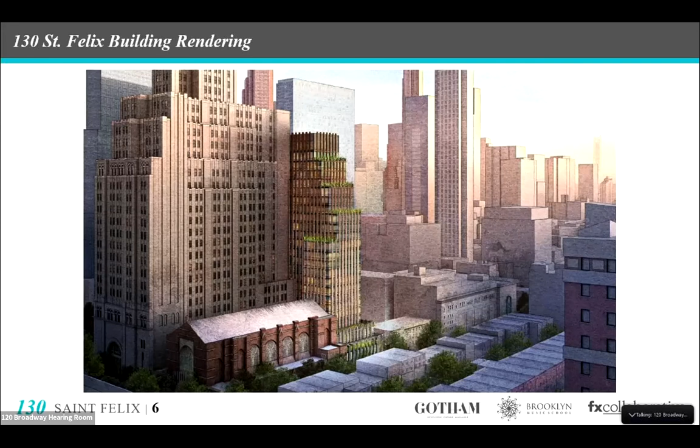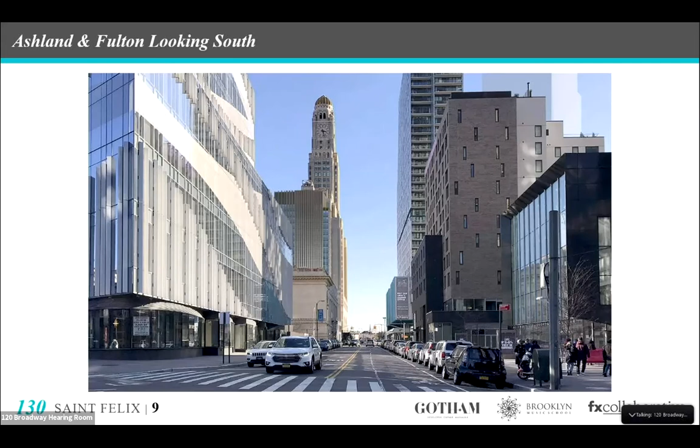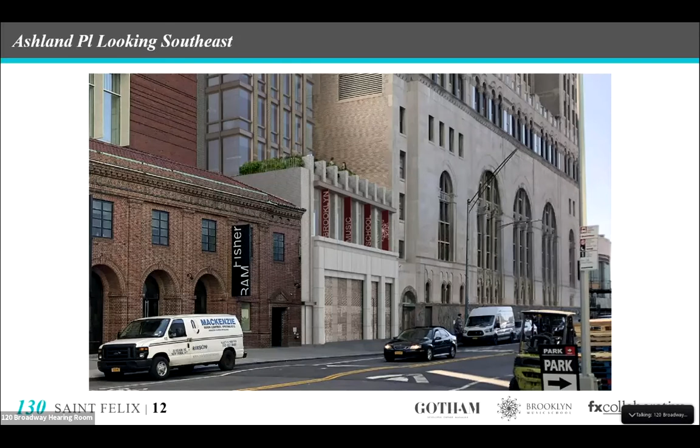This is the Ashland side, how it nestles in between One Hanson Place and BAM Fisher. One thing that came up in review session that we'd like to touch on is...

The north face of the tower was always considered a lot line condition. It's less ornamented, it's plainer, and also those 3 lines of windows that you see there are egress stairs, fire tower courts, and egress corridors.

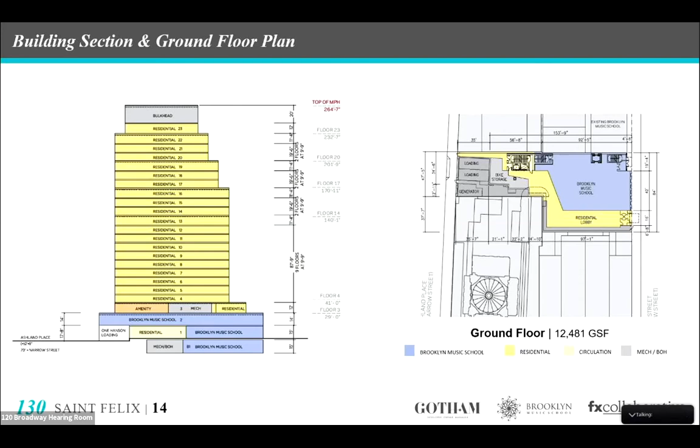That is the Brooklyn Music School. At the base will be 20,000 square feet, and this expansion will allow it to expand the quality and quantity of its offerings and programming, and allow this really beloved institution to thrive in its current location, where it's been for over 100 years. You'll hear more about this in testimony from Shelby Green and other leaders of Brooklyn Music School.

Next, I'll turn it over to Stephanie Rhodes from the Gotham organization. We'll talk about the affordability of the units.

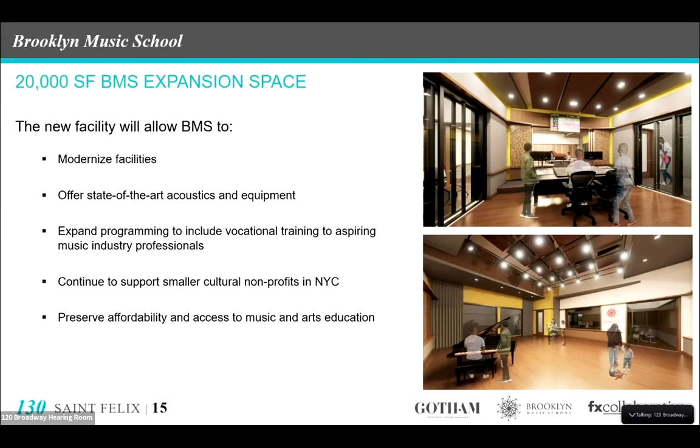As we all know, access to affordable housing is of paramount importance citywide. In Brooklyn Community District 2, where the site is located, the issue is pronounced. The Community Board consistently lists affordable housing as one of the top 3 issues facing the district in their annual statement of needs.

In particular, residents can't afford to own homes in this district and are increasingly being displaced as a result. Our proposal focuses on home ownership. We propose to set aside 30% of the units for income-targeted home ownership through the MIH workforce housing option.

Our proposal caters to the working middle class, families with income levels from 70% of area median income, which is below the lowest area median income of 80% allowable in HPD's homeownership program term sheet, and up to 100% of area median income.

The overall average AMI is 93%. Again, this is below the maximum allowable average AMI for the MIH workforce housing option. This will provide an opportunity for residents of the community to afford to put down roots, and bridges a major gap in economic opportunity and addresses racial disparity in access to affordable homeownership.

Homeownership allows for tax benefits and wealth building that rental does not, and yet rental remains the most accessible affordable housing option available, especially in this neighborhood. This represents an unprecedented opportunity for families to build social and financial equity for the future.

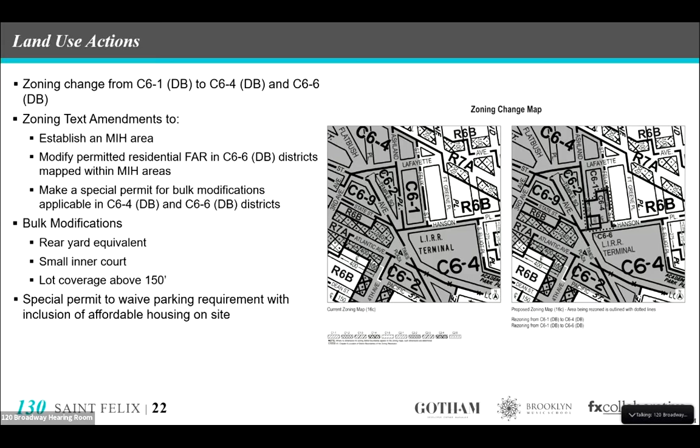It will also allow for a building which is quite a bit lower in height than what zoning allows today, in excess of 200 feet lower than what is allowed today, and will allow for a lower street wall height than is allowed today. So we do think it is the right zoning, and we do think the building is one that works well in the context. Thank you very much.